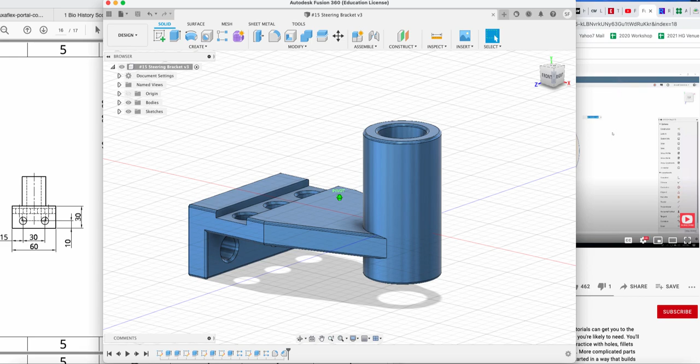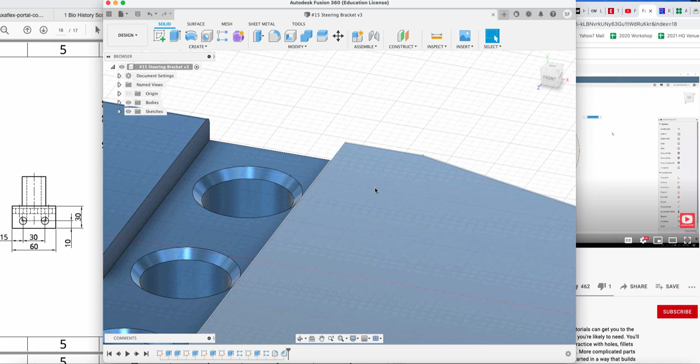Here we are with the bracket that I have made. I've completed this one and anodized it blue - it's aluminum, anodized that color - and this is what we're trying to achieve. I think it looks really cool, with a few added radiuses and chamfers in the holes. These little holes have chamfers, which are little 45-degree cuts, and on the edges of all these I've put tiny little radiuses. So this is what we're trying to achieve.

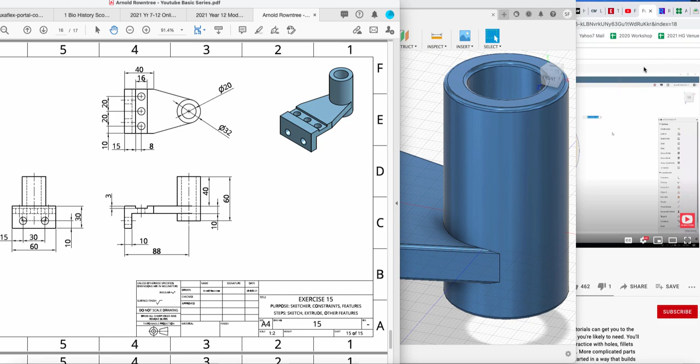I am going to start a new one. I do have this document here in the background with all the measurements on it, which you don't really need if you're using Dude's YouTube like this, Arnold Rowntree. You can just watch his video and do the measurements as he does, or use the PDF, but you'll notice I've got both there in the background, so if I ever miss what he says I can just pause for a second.

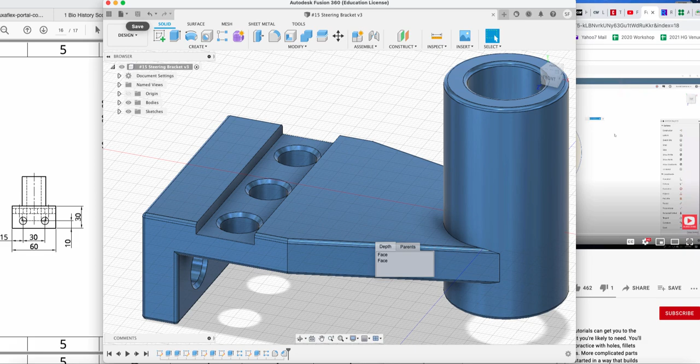Alright, let's get going. I noticed Arnold's using an older version, so he's using shortcuts and a slightly older version, so I'm going to redo it. So if I go up here and go File, New Design, this is what it'll look like.

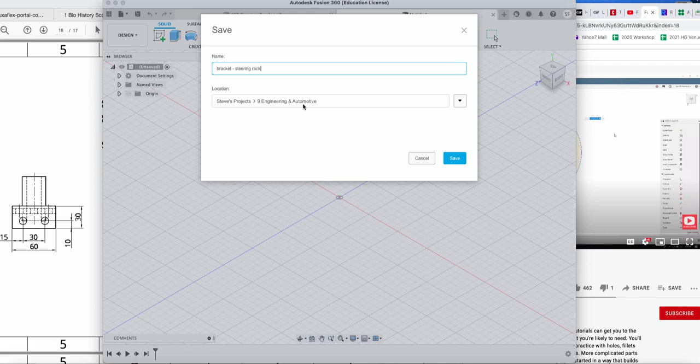Alright, let's get going. The first thing you should do is probably save it. So click on Save and call this bracket, or whatever you want to call it - looks kind of like a steering bracket, so I might call it a steering rack bracket or something like that. And I'm putting it in a folder, and then there it is, new name.

I am going to start with a sketch. So again, click on the sketch. It'll prompt me to pick a side of the box you want to draw on - front, side, or top. I'm going to go for top, this flat plane here. So I'll click it and it'll spin around for me.

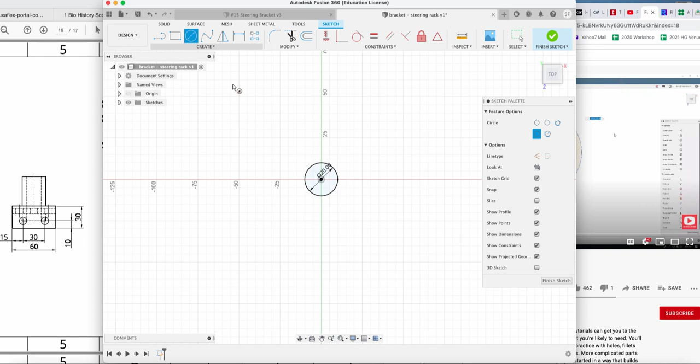Alright, circle - remember he's using shortcuts, so if I hover it, it says if I just press C on the keyboard it'll go for circle. I don't use keyboard shortcuts, but hey, the bloke in the video does. There are two options here: he just clicks and drags, that's one option, or you can click and write the actual number. I think that's supposed to be 20. Enter. Circle again, and notice here if I make any old measurement up, I can change it by going to dimension.

And when I click on it, I can then change it to what it's supposed to be. I think it's supposed to be 32, and you'll see here 32 and 20.

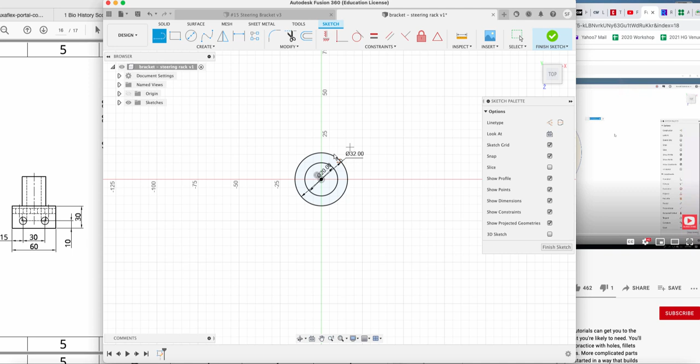Alright, then what he does is goes and draws a line, a series of lines actually, 2, 4, 5 lines off this circle. It doesn't really matter where, so I could just click on this circle somewhere and draw it. So say I go here, here, there, somewhere random - let's do it particularly random. Here, here.

And then he does some tricky thing - he says, oh, I'll get it tangential. See how there's that little blue circle with a line on it? You don't have to, but he does. Let's just pick any old point.

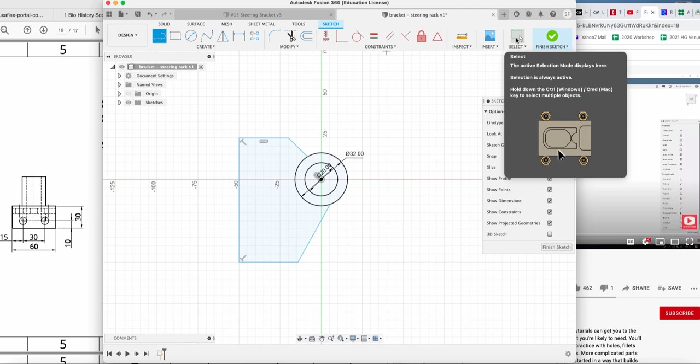He then goes and does some keyboard shortcut to get those lines right, and one of them is he goes up here to select. So I might change some of the measurements and then do the modifications that he does - for instance he goes in here and makes it 40 by 60, I think it is.

Yes, 60. Alright, he goes up here and goes - oops - dimension, this line here is supposed to be 40. Enter. He then goes over here, or something like this, and says that's supposed to be 60. Alright, this bottom line should be the same, and he does use - I could go down here and click on it and say this is supposed to be 40 as well - but I'll show you what he does.

So I'll undo that. He goes in and says select this line, and holds shift down and selects that one. He says notice this little bar just changed, and now it says what do you want to do - make these lines horizontal or vertical, coincident? That's a maths word, that's why maths is important. Coincident, tangential, which again is a line at 90 degrees to the edge of the circle, equal, parallel, blah blah blah blah - equal, he does equal. So he clicks that, and it probably should make it the same length.

So let's try that again. This one, I think what you do is delete.

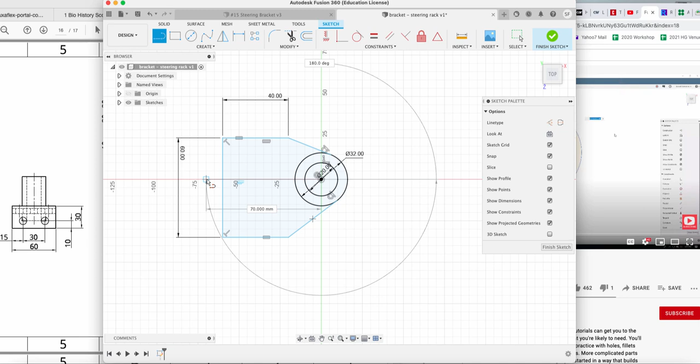The circle is higher up in this, and this is where he goes and draws a line. So I'm going to go and draw a line. He draws a line from the center of the circle out the back here. All right, it doesn't matter where, you just click. So I've just drawn a line, press escape, and this line here, I'm clicking on it.

So I don't want it to be an actual line, I want it to be an invisible line, and he calls it a construction line. So he goes over here and says line type. I've got a construction line or a center line. I could probably use center line. I think he does use construction.

And he clicks it and it makes it dotted. Just means it's not an actual line, it's just an imaginary kind of style of line. So then what he does is he goes into dimensions and says, well, I want the line from here to this line here. Oops, let it go. Escape, he goes dimension to here and out.

And this line should be half of 60, so it should be 30. And you'll see there it goes magically symmetrical. And I believe if I flip this object around, yeah, it does. It is symmetrical now.

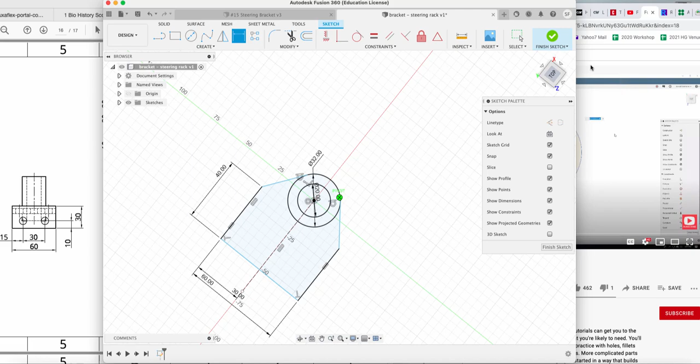So that's how he gets that image right. I'm just looking at that now and thinking, hang on a second, that's not 100% right. If you click on his drawing here, from the edge of the bracket to the middle of the circle, it should be 88. And mine is clearly not 88.

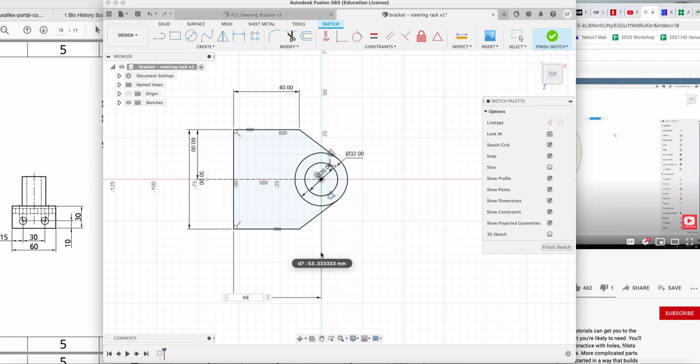So let's go dimension that. Let's go center of the circle to the line. This measurement here should be 88. Boom. And let's just go and have a look now. That's pretty proportional to what we're supposed to be doing. All right, I might stop the sketch there for a minute, look at it.

That is our flat basic outline, and then he goes and pulls those circles up and pushes a little edge down.

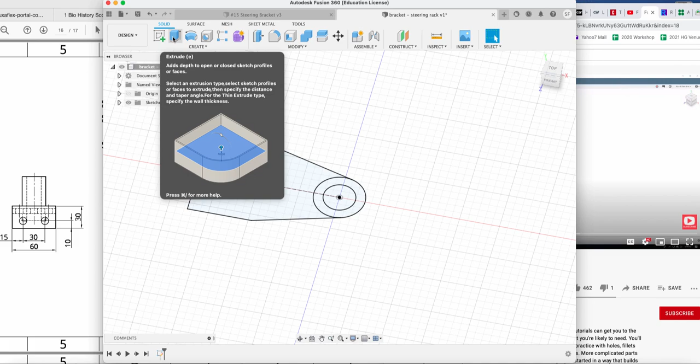Let's go give this bracket its body or its thickness. So we're going to extrude. I'll go up here to extrude, E is a shortcut. And what do I want to extrude? And it'll say what type of extrusion, a thin thing, I don't know what, anyway, we're doing an extrude. Profile, select the bit you want.

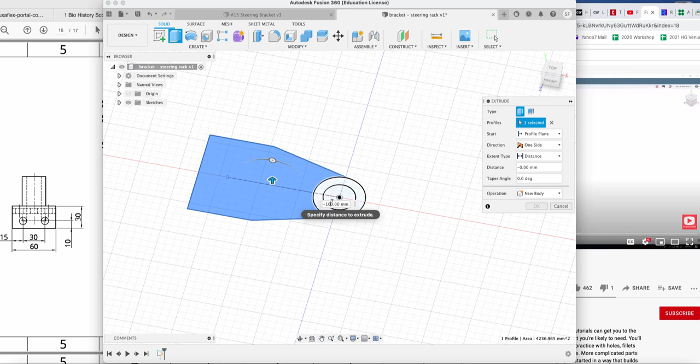I could select this one or this one or this one. We've got options here. So at the moment I'm going to do this, and I think in the video he sends it down. So at the moment, if I write 10, it comes up 10, but if I write minus 10, I think, ooh, minus 100, minus 10. Enter. All right.

The other thing he does in his video, he says, hang on a second, where's my circles gone that were here? He goes up here to sketches. And remember, these eyes turn on and off sketches.

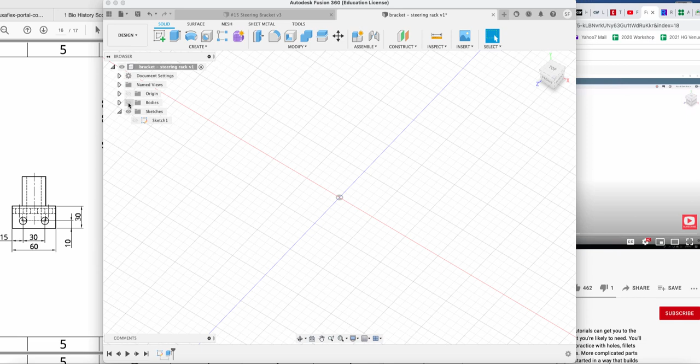So the circle sketches are here, or the original sketch we did, and it's actually turned off. If I turn the body off, that thing we've drawn will disappear. In the sketches, we've only got one body at the moment, and it's this.

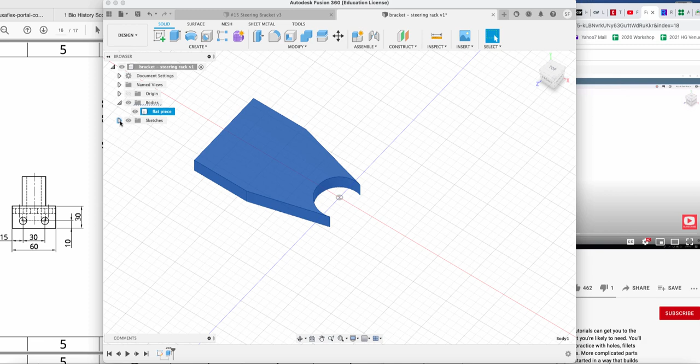So I could write flat area, so I know what it is, the flat piece. I'd prefer to do that so I know what I'm talking about when I've made these bits. Same with sketches, that's the plane sketch - you could call that whatever you want by double clicking on it. All right, I'm going to turn it on.

That's what he does, so he gets his circles. He then goes, all right, I'm going to extrude these something, and again here it says profile. What do you want to extrude? And you go this, and we do want to pull it up and down.

He does pull it up a certain amount - 40 millimeters. So he writes in here 40. But he does do it in two sides, not symmetrical. If you click symmetrical, it goes up 40 and down 40. But he actually does something tricky - he says, I want to go two sides, so I want to go up 40, but I want this one to actually only go down 20. All right, so that's what he does.

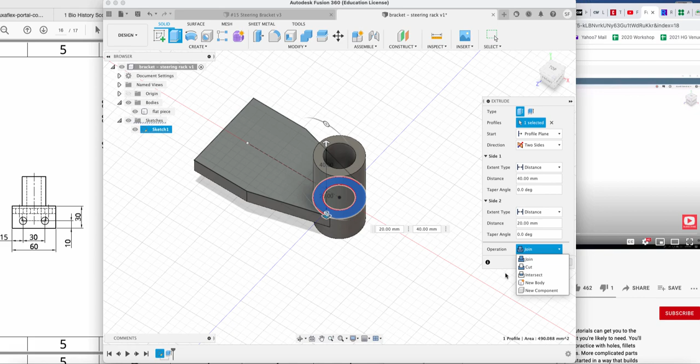By the way, down here by default, mine says join, which is what we want to do. If you wanted to cut it or something else, you can chop away objects so that occasionally you might cut away at something. We're going to join it, so I'll click OK, and there we have our tube where on a go-kart the steering shaft would go down through that - that's what I'm imagining this object to be.

All right, so now we're looking good, and we should see bodies here and sketches. I don't know why I don't have a tube body flat piece - I guess because it's all one part of it.

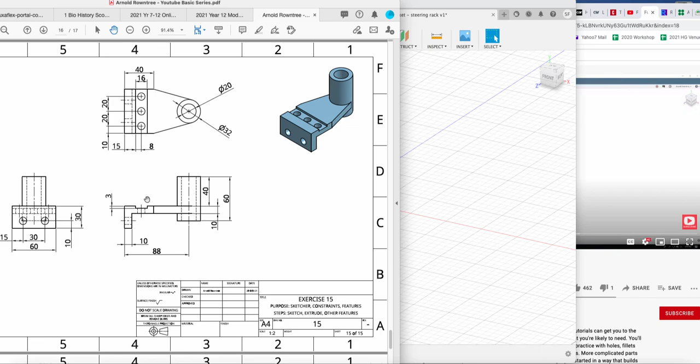But anyway, all right, let's go and draw a little bit more of this little piece hanging down the bottom here, or that on it. He goes to the bottom of this object, so you can click here and go, I want to see on the bottom, or you just click and drag.

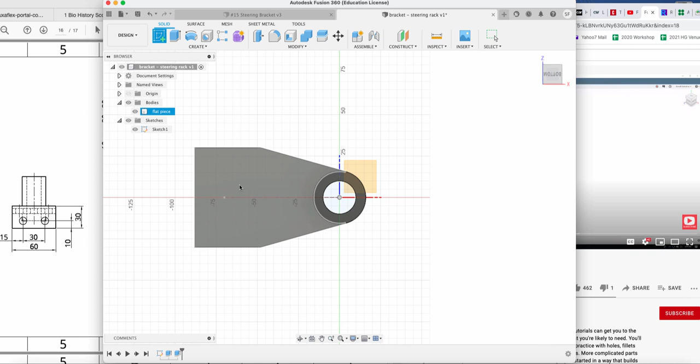Probably easier to click on the bottom. He goes up here and draws a sketch somewhere on the object here. He wants a line, so you'll see the toolbar just changed. He draws a line - he does it purposely crooked. If I draw a line from here down, I can get it bang on 90 degrees.

So see that little blue square that says 90 degrees or perpendicular. He goes and says do it off 90 just on purpose. He clicks like that and says, well, there you go, do that - it's clearly not perpendicular. He then says, oh, try this, select the line, and you can go up here and say I want it to be perpendicular. I think I have to select another line, so I think you go that and then select with the shift key, shift the outer edge, and then perpendicular, and now it's made them perpendicular.

So another little magic trick he does, which he didn't really explain, but he did it quite quick, and it was on a different toolbar, so it was kind of hard to see.

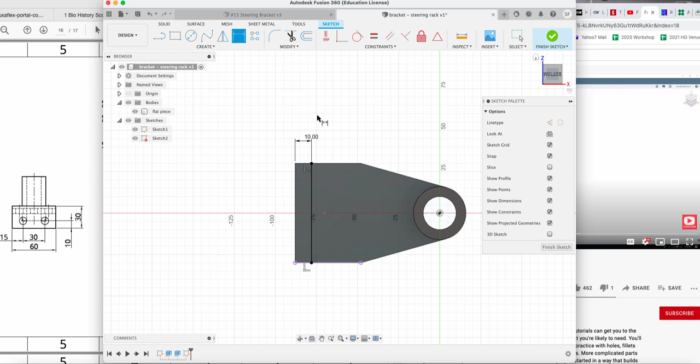All right, all we've done is drawn a line there. So we want to put a measurement on that. We go up here to dimension, and I want the measurement from here to here to be 10 - that's how thick the steel is in this case. You'll see now it's 10 mil. Everything else, this whole plate here was 10, so this is going to come down 10.

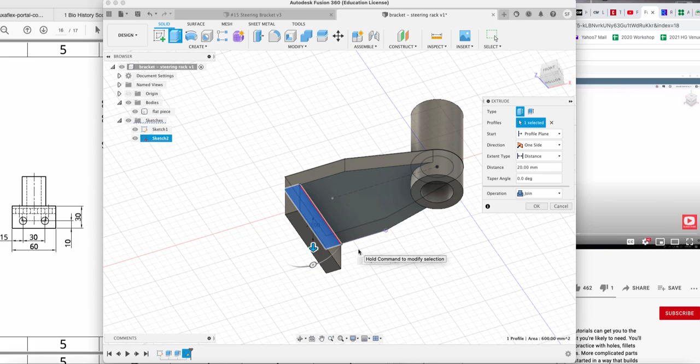He's now going to finish the sketch and goes over to extrude, clicks on, it says what do you want to extrude? This bit, this bit - anyway, he selects that little rectangle and brings it down 20 from memory. If I go over here and check, it's 30 in total, and that thing's 10, so yes, 20. Come back here, and I'll write in there 20. Enter. All right, now it's starting to look like his thing, his bracket.

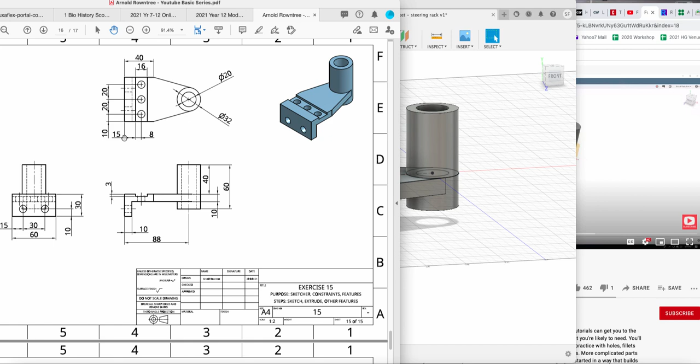Continuing on with our bracket, we are going to put in this little channel, or cutaway, in the top here where the 3 circles are. If you're looking at this plan, it's this little rectangular row here. It's 16 millimeters wide, 3 millimeters deep, and it sits 15 millimeters from the back edge. Those are the numbers he uses.

So he goes over here and says, alright, I need to do a new sketch. Clicks on the sketch tool. I want to draw it on this face, and then it'll square up for me. Then I'll go rectangle, and let's just bang in any old rectangle we want.

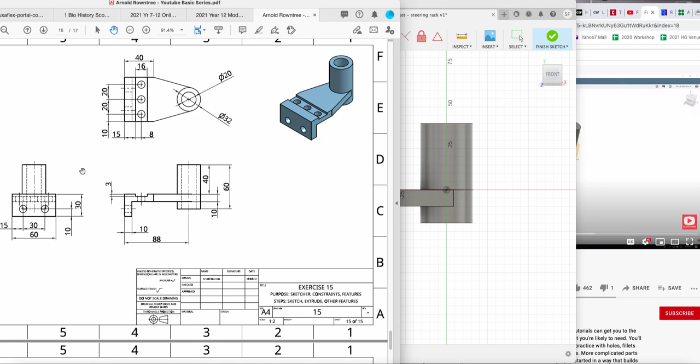He then changes the measurements and says, oh no, this needs to be 16, I think it was. Let me just check that. 16, 15 from the edge, and 3 millimeters deep. Let's make it 3 millimeters deep.

So you see here, I'm toggling over it, hovering over this dot and the bottom dot. Drag it out here. At the moment it's 5 millimeters deep, and I only want it 3.

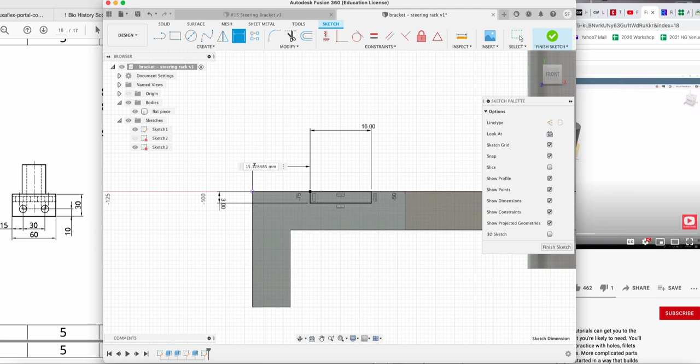And enter. Okay, the last measurement is I want the little channel here - don't know if you can see that - to be from here to here. I want that to be 15. That's pretty close, and there you go, it sits there. That channel now is in the right spot.

And I'm going to extrude that. So I'm going to go up here to extrude, and again the menu bar normally prompts you to say what do you want to select, what you want to extrude. So keep checking this little square bar here. I want to extrude this little rectangle we've just drawn.

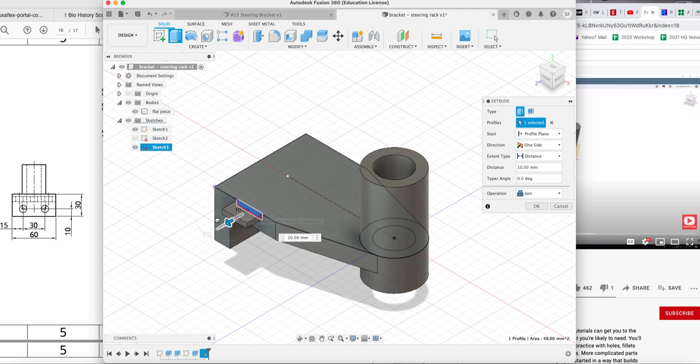Okay, do we want to do this or do we want to do this? I can tell you now we want to chop away that. Notice down here it says cut by default. If I drag it up here, it's now thinking you want to add on it because there's nothing there to cut. So it's worth having a look - it's gone red, which means it's going to cut. It's going to chop away how much. I've just dragged it beyond my thing.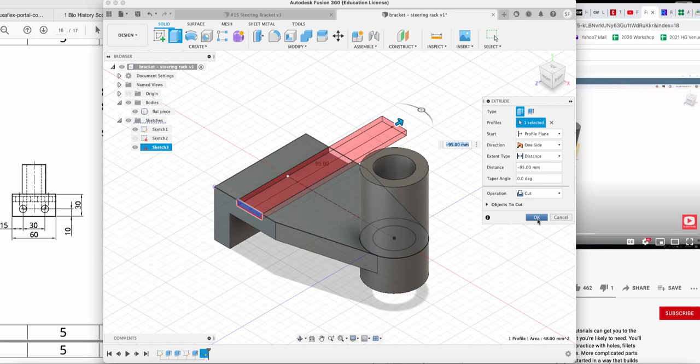You could write an exact measurement there, and you can do different things like a cut away in both directions. So if I click OK, it has now cut out that little slot, which is exactly what we wanted to do.

Continuing on now with our bracket, we're going to put in the final little holes that appear - the 3 holes in this slot and the 2 on the back. Again, there is an easy way to do this. You can just go and draw 3 circles and position them exactly how you want.

He does show you a cool feature that I will go and show you, and I'll try and attempt to do it now. So he goes into sketch, and again, where do we want to sketch? Let me pause for a second - I saw what he did, he selected this little face here. So where was I? Not in sketch - yes, it was sketch.

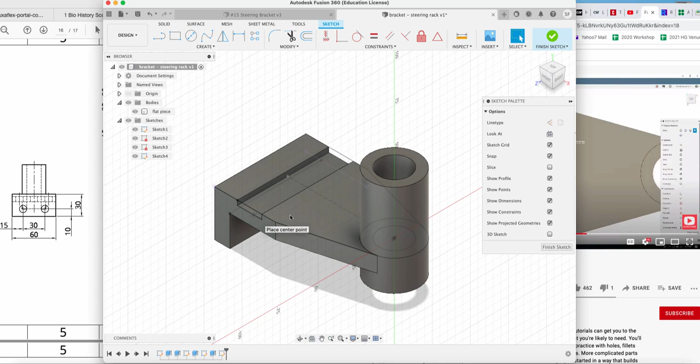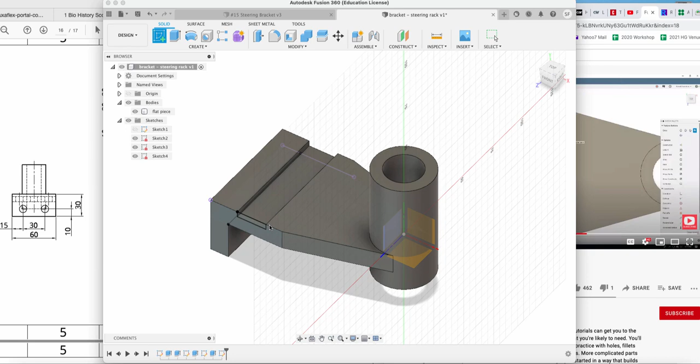So circle - and I don't know if it's top, actually let me go back a sec, I'm not sure - it gave me the option on which face. So if I go sketch, it's now saying which face do you want to sketch on. I want to try and sketch in the bottom of that extrusion we did, and if it won't allow you, I think we can click on there. So we want to click that grey face at the bottom of this little slot, not the top, in there. You'll notice it's now set. Alright, sweet, I know what you're trying to do. It's just spun around by the way, so I can draw in the bottom of that trench.

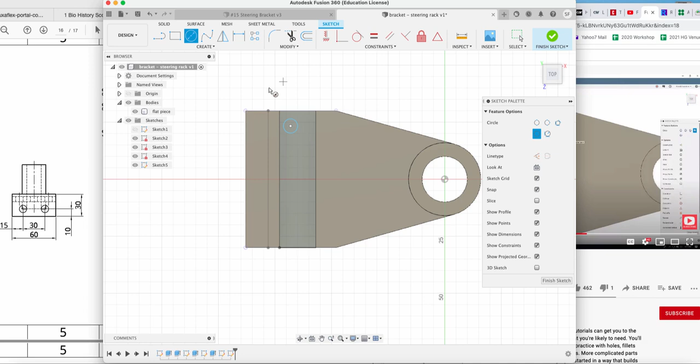I'm going to draw a circle. Click on the circle, throw it anywhere you want. There. Okay, the measurement of this circle is supposed to be 10, and then we're going to clearly go and make that 10 by changing the measurement. It is supposed to be in the center.

So if you look here, the center of that slot would be 8 because the slot is 16. So I'm going to go over here to dimension and say I want the center to this line to be 8 millimeters, and it'll center it. The distance from the edge, the hole is 10 millimeters.

There you can see it, 10 from the edge. So again, he goes dimension from the center to this edge here. That should be 10. Okay, here's where he does something cool.

I could go and draw 3 more circles, but we're not going to do that. We're going to use a cool tool called pattern tool. So he uses some shortcut. I don't want a circular pattern.

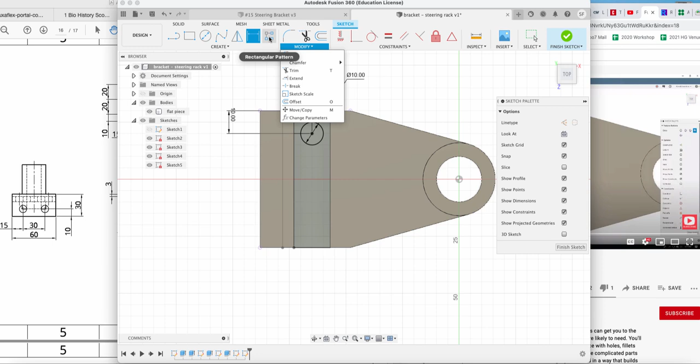For instance, if I had a series of little holes around this on this circle, I could click on circular pattern. It's rectangular pattern, and it happens to be up here in the top of the menu bar anyway, but it is this square looking thing. So up here, rectangular pattern, it'll say, what do you want a pattern?

We want to select a feature. And from memory... I missed something. Just realized I haven't extruded that hole.

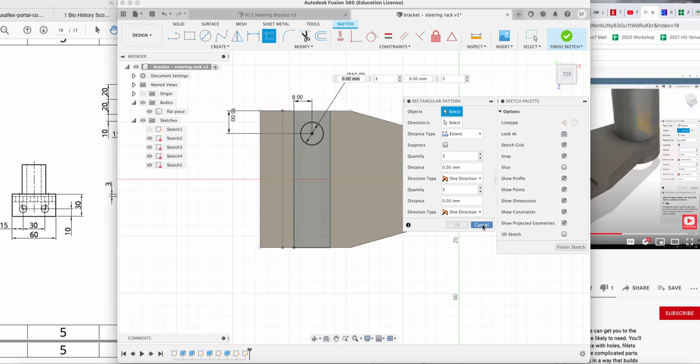So for that pattern tool, we want to finish the sketch, drawn on the circle, go back home. At the moment I've only got a circle there, I haven't actually got a hole. So let's extrude that hole.

And again, do we want to add or subtract? We want to subtract or cut away. And then you look at it now and you'll see now you have a cutaway hole right through it.

Alright, and this is where you go to pattern. I jumped the gun a little bit. I'm going to click on pattern. What do we want to pattern?

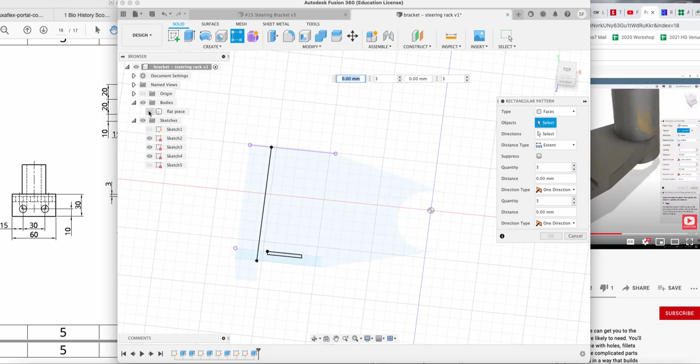We actually want features. Okay, it could be bodies, but he uses features, so I'm going to just click on features. Yeah, I think it's because we've only got one body here. If you turn off the body, that's all you got. But if we had multiple separate bits on here, we could select one and not another.

So features is this one here, and I click features and it'll probably say select your feature.

And he uses the tree, this thing down the bottom of the menu bar, see this, he calls that the tree. And every step we've done is here. So this was the original sketch, this was my first extrude, and you'll notice that the part is changing color as that's the tubes I extruded.

Then I drew, I can't remember what else, probably this little thing at the back here, extruded that. Drew another little rectangle, extruded this one, this slot, and then I've drawn the circles. And now I've extruded a circle.

So I'm coming down here to feature, and he selects this last one because this little extruded feature here. I might just escape that and see if I can redo without selecting. And I'm going to go feature.

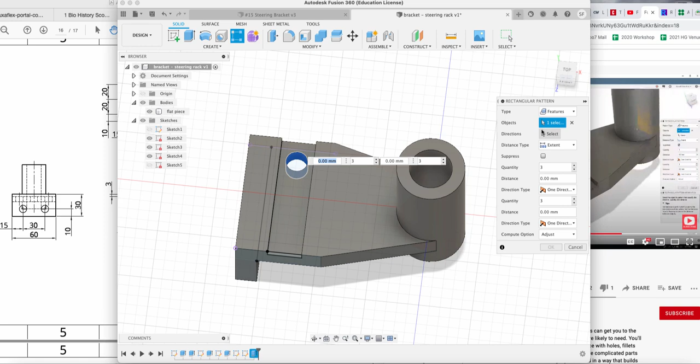Let me see if I can actually select it. I think I can. So I just selected the cylinder, so it looks like you can do this or that. Okay, how many of these and what direction do we want to go?

The direction. Okay, do we want to go up or left, right, or in and out? And so we've got to select something that represents the direction.

So we want to come in this, on my screen now, it's downwards. So I need a line that runs in a straight line downwards. So I'm going to select this or this or this. Just click on it and you'll see here I'm running in an up-down pattern right now.

Okay, I do actually want 3. If I want 4 or 5 holes or 2, I change the quantity here or in this little pop-up. That's 2 holes. I actually do want 3, and the measurement here is how far apart they are.

So if I went 20, they're too close together. And if I go to this sketch, you'll notice here it's actually 20 and 20. So they're from the beginning to the end, or in the center of them, from the first to the last.

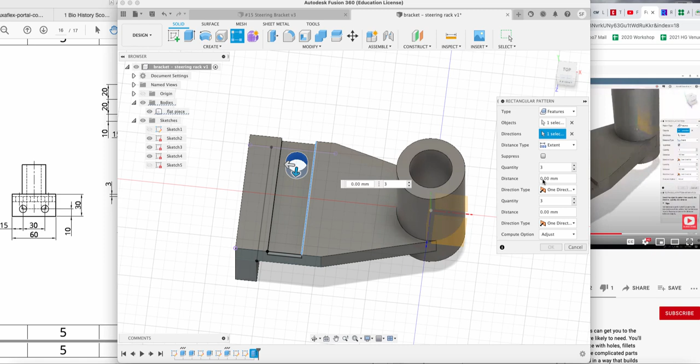Is 40 millimeters. So if I go back here, I want to write in this measurement here, or here, either or, 40. And you'll notice it's put them in grey saying this is where they'll go, and I'll go, sure, let's do it. And then I get a pattern of 3 identical holes.

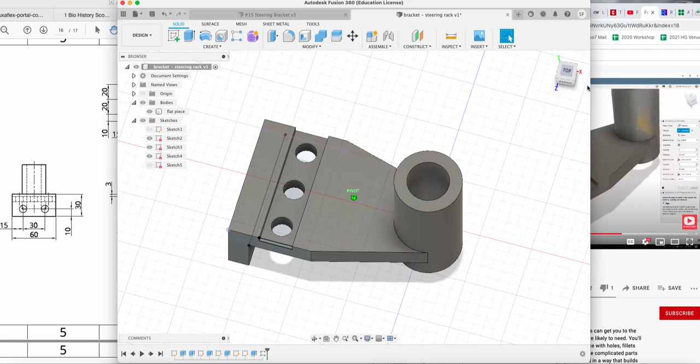So that is quite a fast way to do multiple holes without having to redraw, redimension, extrude each one and get the spacing right. It just does it, which is pretty cool.

All right, let's do it one more time on this back edge here. So I'm going to get my cube and rotate it, or click on left.

Okay, I'm looking at this back face. What do I want to do? I want to sketch on it. So click the sketch tool, click on the face, draw a circle anywhere.

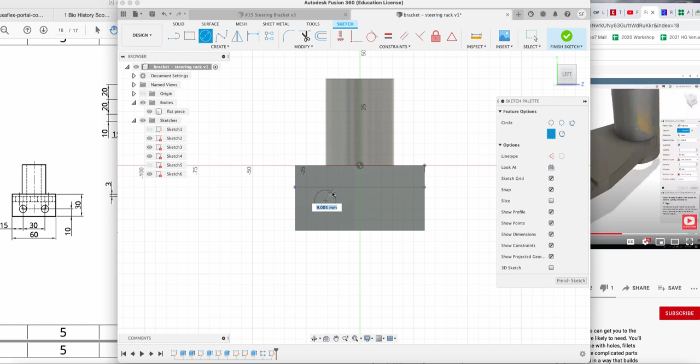I want that circle, let's finish it. Oops, shouldn't have finished it. Let's go back. Notice I can go down to this tree here, right click, edit, and it'll go back to that sketch.

The other thing I think I could have done is go back to sketch and click on this thing. And I think I could go dimension of this and change it. Ooh, okay. I don't know if I'm editing the sketch now or not.

Escape. I want to change it. So maybe I've got to select. Oh, let's see if I can select it. Select little circle. I'm just seeing if there's an alternate way to do it.

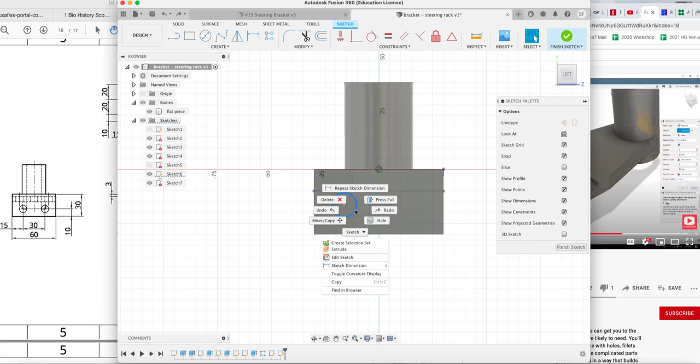Okay, let's go back. Well, how would I do it? Select it. Can I edit it? Sketch. Just trying to see if there's an alternate way to get back into that little sketch. Dimension. Saying I can't chuck it on there.

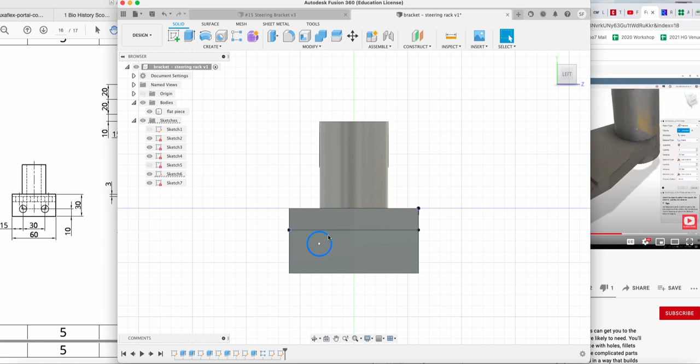Finish the sketch. How would I edit that? There is another way, I'm just trying to remember how to do it. Edit the sketch. Alright, so I can basically click on an object with my right key and edit the sketch. So click on the circle, right click, edit the original sketch.

I think that's it. And then I could go dimension and write 10. Okay, that's what we would do. If I undo that for a second and escape, let's pretend I didn't know I could right click.

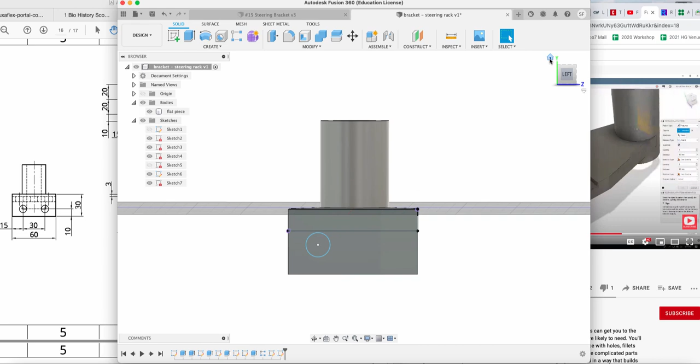You can go down to this tree, this thing at the bottom. By the way, if you click play, let's pause for a second and show you what we've done. If I go down here to the play button, it'll run through step by step everything you've done. And you'll notice this bar has played.

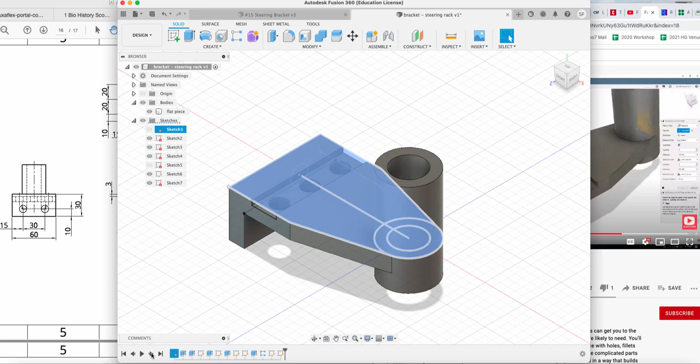It's like you can pull it back to wherever you want and go, hang on a second, I want to look at it when I didn't have that, like any point in the drawing. And I think you can click first, pull the playhead back here and go step 1, step 2, step 3, step 4, so you can go through everything you've done.

I think there's actually a couple of, I think here I could actually delete, I think I made a mistake early on and I could delete one of those, this one or this one. So it's actually that one. I think I could actually delete that and it wouldn't matter because I was fluffing around and sketch number 4 didn't actually do anything.

Hole. So by the way, see how it's got sketch 1, sketch 2, and it highlights it. This is where you could go in and say, hang on a second, sketch 5, 6 is the slot, sketch 6 I think is, what's sketch 7? Is sketch 7 the stuff up as well?

Let me go around the back so I can see what I'm actually looking at here. Can't remember now. Pattern. So that one, sketch 5, I can edit it here, or I could change the name and say 5 is the hole.

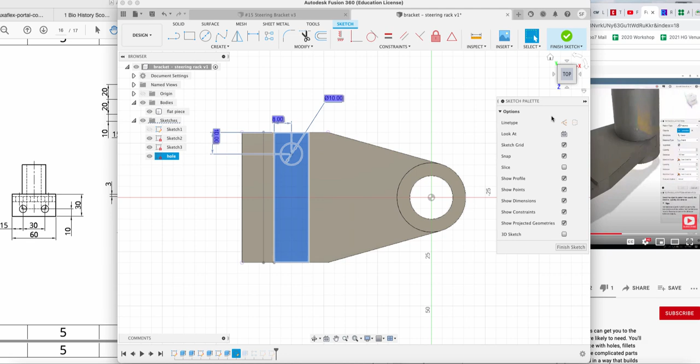And then I know when I go back, I can look at my tree and go, hang on, where's the hole? There it is. You turn it on, you can edit it here. So sketch 6 would be the back face, and then I corrected it to 10 millimeters, I think. Anyway, just thought I'd show you that.

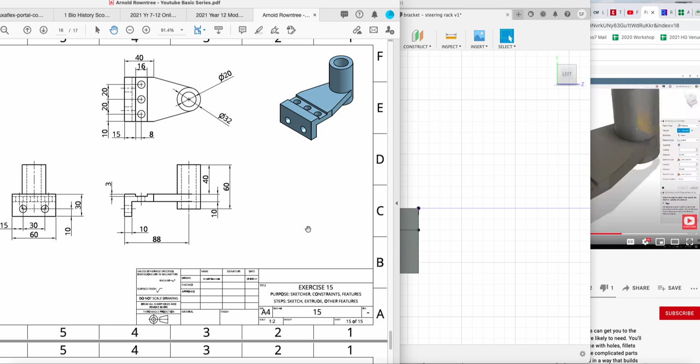Back to where I was. I've got to make sure this is in the right spot. So going here, that hole should be 15 millimeters from the left side and 10 millimeters from the bottom edge. So let's go and edit that sketch. Let's go into here and go edit, and put a measurement on it.

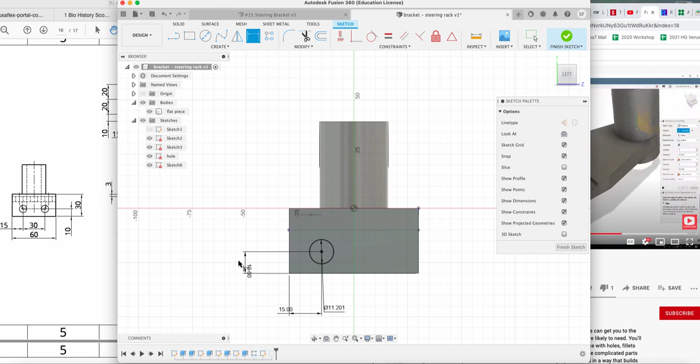So let's go middle of the circle to this edge. Was supposed to be, oh, I'm in the wrong one. Let's try it again. Edit sketch. Center to here, that's supposed to be 15. Okay, and the distance from the bottom, so from here to here, is supposed to be 10. Okay, that's where it's supposed to be.

Finish the sketch. I think that means this one might be, let's see what happens if I delete this.

Let's cancel it, let's play it safe. All right, what we've done is we've drawn a circle on there.

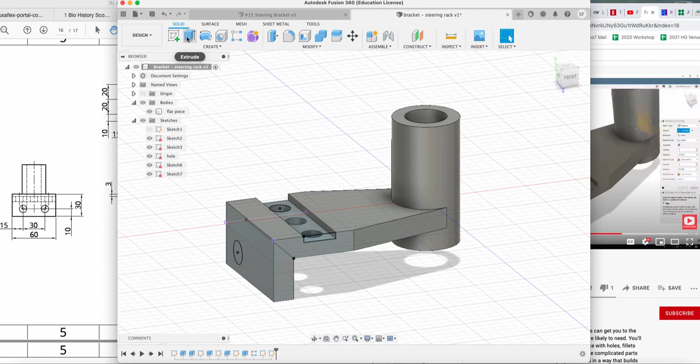I now want to extrude it. Click the extrude, it'll say what do you want to extrude? That circle. Do we want to add or subtract? We want to cut away a hole. Click, yep, done. There's my hole.

Now I want to pattern that hole. Remember how to do it: create a pattern rectangular, and it shows you what you're trying to do here. Rectangular pattern, it'll say feature. Select the feature down here. You can click from the tree at the bottom or the tube here. It says what direction do you want to cut in, and we want to go left right.

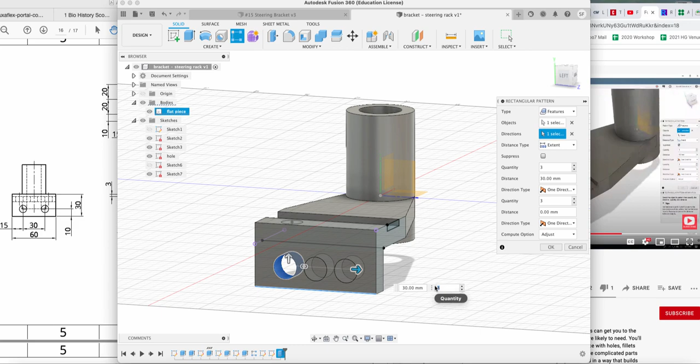Okay, do I want 3 of them? No, I only want 2. And how far apart are they supposed to be? They're actually supposed to be 30 millimeters apart, which is correct. And okay, there we have it.

Magic. All right, it's a beautiful little command, that. So there we have it. Let's go and throw some color on it.

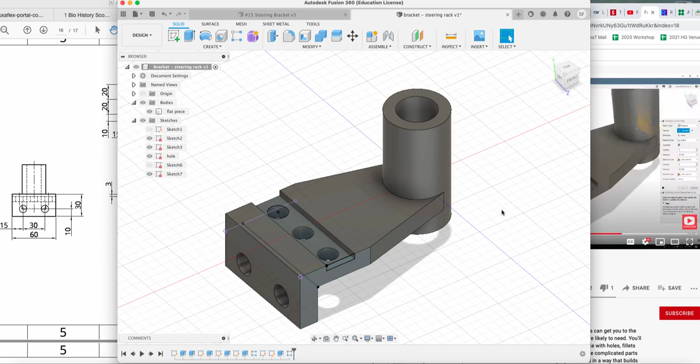So let's go modify physical material, or you can just change the colors of it here. Let's change the material, let's be technical. Do I want it to be like glass? Plastic? Well, let's go metal. Metal's cool, and there's a lot of metals. So aluminium - anyway, they all look the same because it's different grades of aluminium.

I went down here till I saw coloured, and I think on mine I clicked anodized blue, but let's - you can do brass. I can drag brass up here. I can drag red up here. So all it means is I'm going to drag brass onto the thing and go boom, there's brass. What's red look like? Let's go with red, red's fastest.

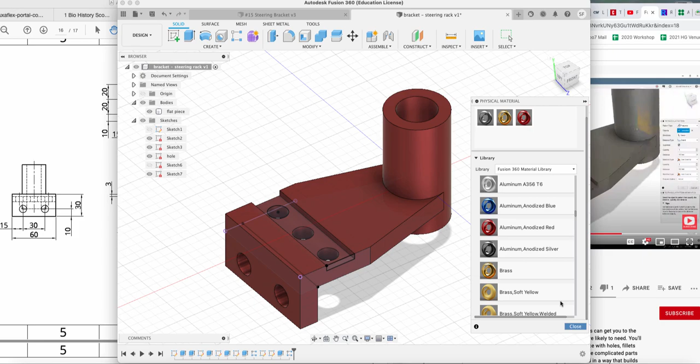Close that. So it's anodized - it's an oxide layer. Actually, it's not really a paint, it's much better than paint. Used on a lot of motorbike parts because it's very scratch resistant, and people who ride motorbikes like colours.

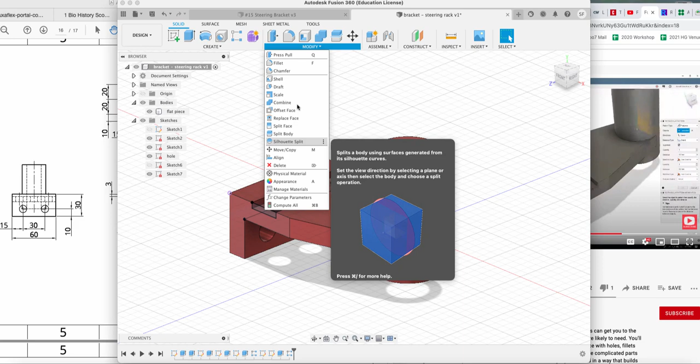So that's pretty much it. I went through on their little radiuses, so modify, and little fillets and chamfers, and that's where they live. They are up here in the top most popular menu bar, so fillet is very popular, so you can always select it from there.

Notice it'll say, well, what do you want to select? You can do one at a time, but I held the shift key down and I selected every edge possible. So I went around the whole thing holding the shift key down. Let's just pretend I've done that, and then we might write on it what sort of fillet. I think I did a 1.5.

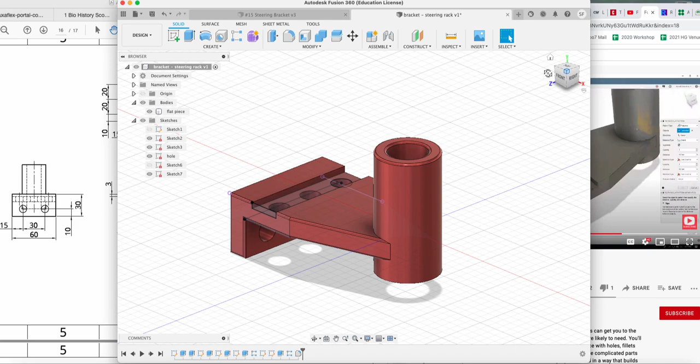What do you reckon? 1 or 1.5? Let's just go 1. Enter. I haven't done it all, but just to show you chamfer.

So chamfer is not as popular, so I've got to go in and click chamfer. Chamfer - what do you want to chamfer? These holes. Hold the shift key down, and then you can do them all. I can scroll and get the shift.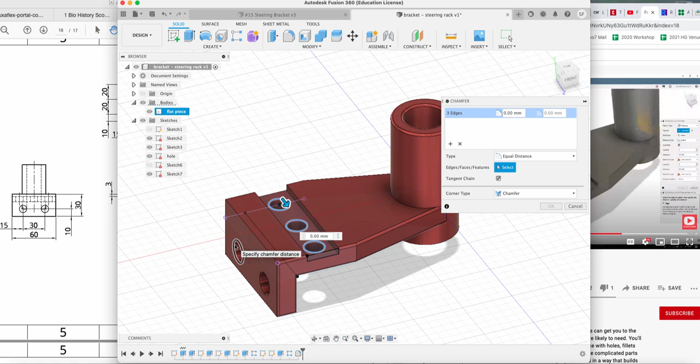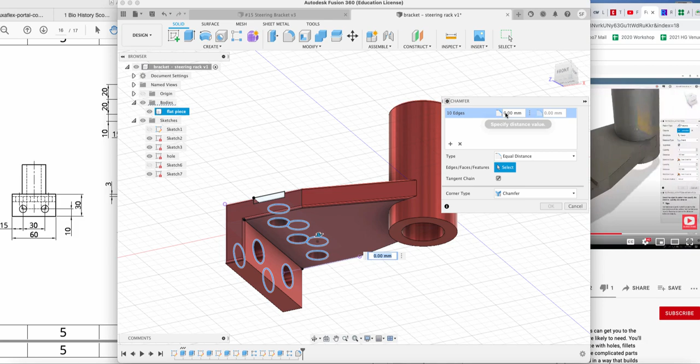And by the way, I might do the undersides as well while I'm more shifty. Shift. So I've got 5 holes, but both ends, so 10 objects, 10 edges. It says here what size chamfer. Let's go to the top so we can see what's going on. Let's do something dramatic and write 2 in there, and you'll see chamfer or counter bore or counter sink.

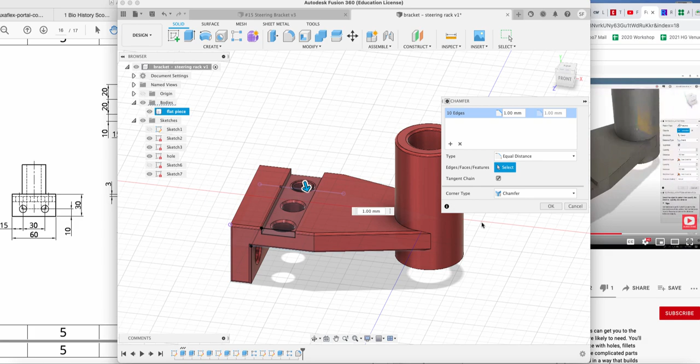That's quite a large chamfer, but I'd probably do a tiny little 1 mil or even a 0.5. If this is a real part, it might just have a 0.5 mil, but it's very hard to see it, so let's stick with 1. Boom. Pretty nifty, and you can zoom in and see my chamfer on those holes.

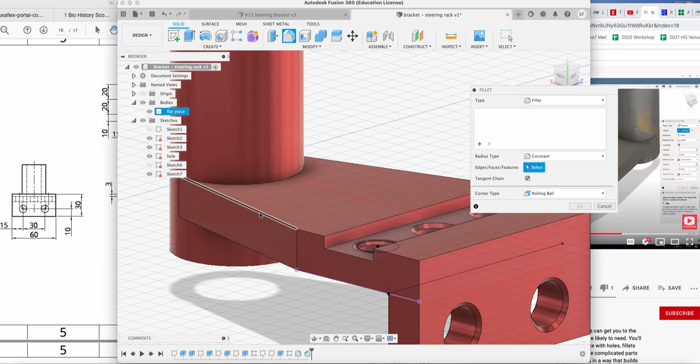I haven't gone around this edge and done the fillets on these, so modify, fillets, select, hold the shift key down, anything you want to fillet, and everything you want to fillet. I think we're doing 1 mil, aren't we? So basically I'll go around the whole thing.

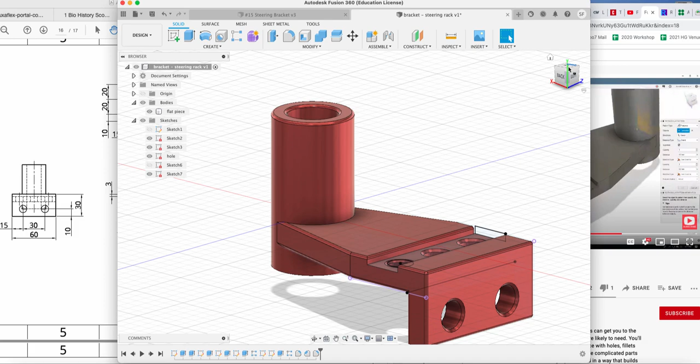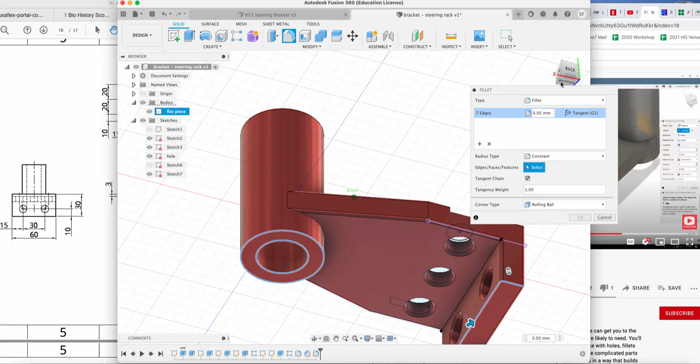Missed a few holes, so let's go circle edge, hold the shift, this one and this one. I'll just scroll around, make sure I've got the other side. Yep, the only thing I haven't done is this bottom edge here, so if I wanted to do that I could, but I don't want to. 1 millimeter, done. Send it home, and there we have it.

Red bracket. It looks beautiful.

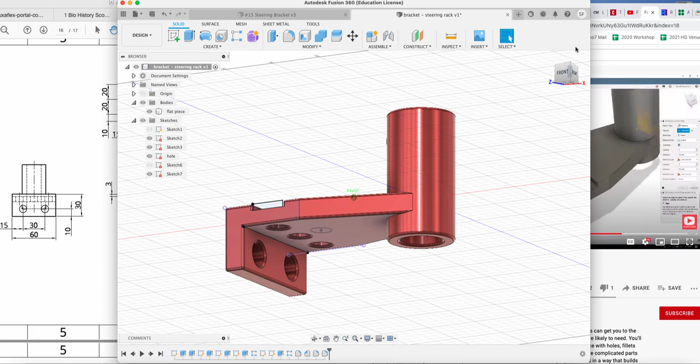Yeah, so it's worth having a look, even just to play around at what do all these icons do, what does this play bar do. So let's run it through the play bar again. Press play and it'll go step 1, step 2, step 3, step 4, step 5, step 6, bit by bit. Very cool, I reckon, this feature.